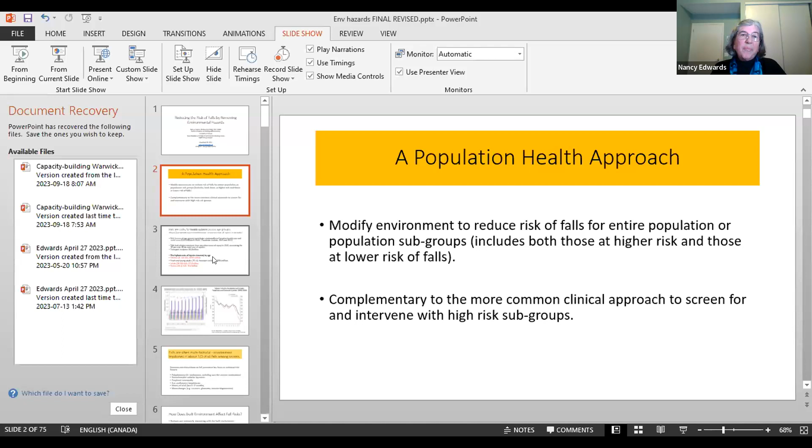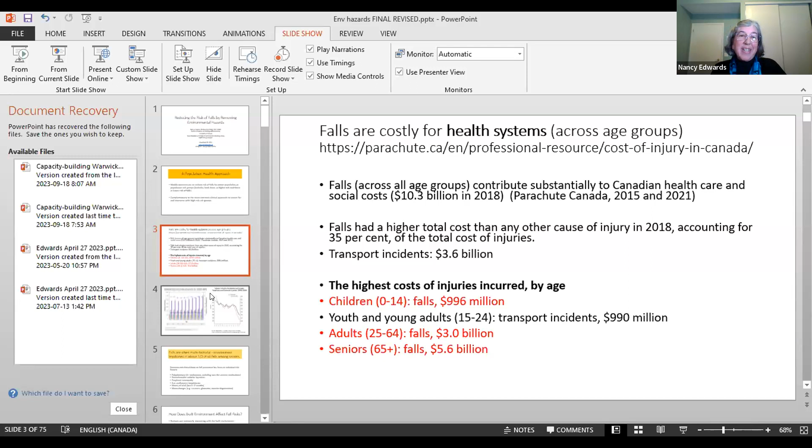So what is it that they're getting right in the transportation sector that we're not getting right in the health sector? Those declines in motor vehicle accidents are largely due to a number of changes that have been made in vehicles, but also changes specifically to the environment where people drive, like traffic calming techniques and others.

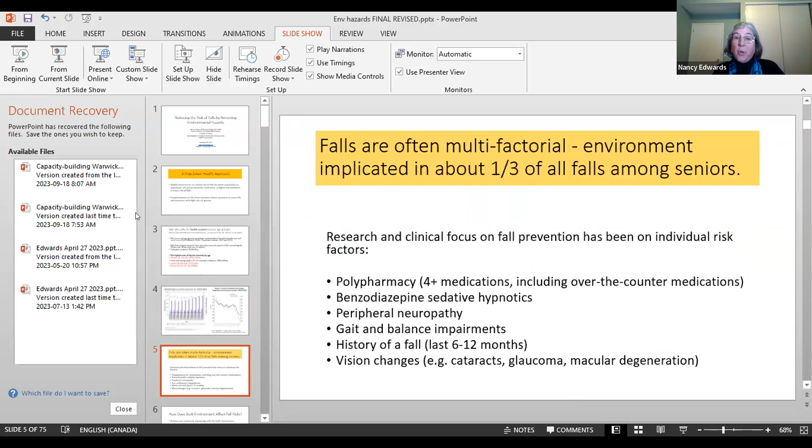Falls are often multifactorial, if not always. We've known this for a very long time, and there are many studies that show the environment is implicated in about 1/3 of all falls among seniors. But the focus often has been on these other risk factors. While those are important, it's the environment I'm going to focus on today.

So how does the built environment affect our risk of falls? Well, first of all, we are constantly interacting with the built environment. And there's something called environmental press, which occupational and physiotherapists know very well. This is where the environment actually challenges us. The environment can over-challenge us, which can be a problem, or it can under-challenge us, which is also a problem because we need that environmental press to help us stay physically healthy.

But there are features of the built environment where the environmental press is too much, and that increase the risk of falls. For example, transition points are often difficult to navigate. This could be because there's a change in lighting—think about going from outside to inside, from your ground floor to your basement. There's a change in surface friction, which changes the traction you've got with the soles of your feet or your shoes. There may be obstacles on walking paths. Steps and stairs are very common transition points.

The environment can also offer miscues—and I'll show you some examples in a few minutes—where it suggests to our vision, and perhaps to our tactile senses, that some change is going to happen in the environment, but the change that actually happens doesn't match the cue we got. We can also have environmental features that are very physically demanding, requiring a shift in our body position, our center of gravity, requiring us to maintain or restore our balance, like when we step into a bathtub or have to use our body weight to open a heavy door, or an increase in effort, like going up or down steps or stairs.

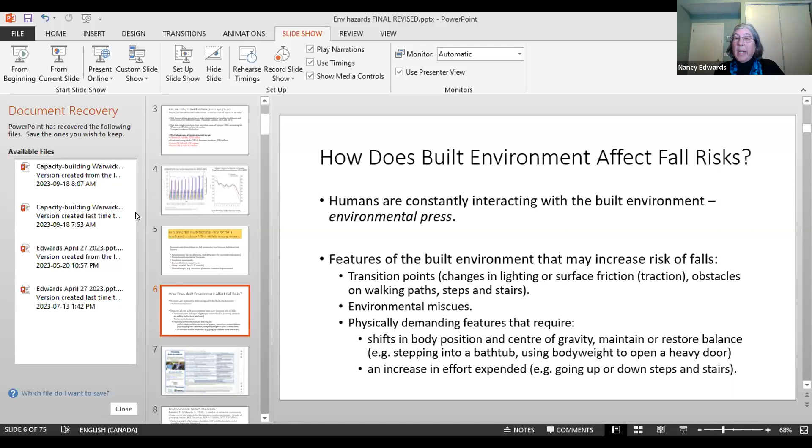Nancy, I don't mean to interrupt. I just want to see if we can try and troubleshoot the slide size. Let me just try this and see if that works. I just tried something else. Does that work? That works. Yeah, now we're seeing just the slide in its full size. Very good, thank you very much for that.

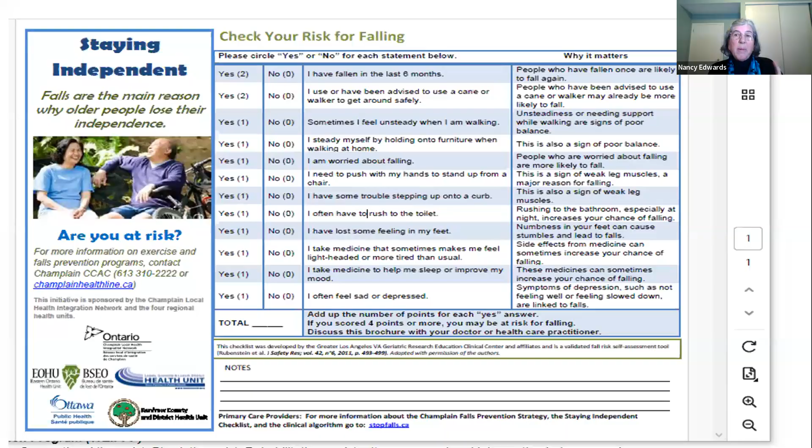Well, thank you. So here's an example of a very commonly used checklist. This one was developed in the Champlain district, but versions of this are used all across the country, and there are other types of examples. This is getting at the personal risk factors. I really like the column that says why the risk factor matters, so people understand that. But there's virtually nothing in this checklist that asks about the environment. So we've got a gap there.

Along with some colleagues a few years ago, we looked at the environmental hazard checklists available in the literature, and we found 42 different ones, most in published articles, some in the gray literature. But unlike that Champlain district checklist I just showed you, none of these environmental hazard checklists were widely used.

There was a lot of inconsistencies across them. For example, which rooms were assessed, whether or not they included indoor and outdoor stairs and steps, how responses were coded. There were very few checklists that even implicitly examined person-environment fit and that environmental press issue I just spoke about.

We were very interested in the assessment of bathrooms and stairs, and found that most of the checklists didn't focus on structural hazards in bathrooms like grab bars. They might ask about bath mats, they might ask about lighting, but not about actual grab bars or structural supports for the installation of grab bars.

And those for stairs and steps often asked about things like clutter on stairs, but didn't get at the construction geometry of stairs, like the dimensions of the treads, whether or not there were open risers, and so on.

So why focus on stair and bathroom falls, which is going to be the bulk of my presentation today? Well, first of all, we know that injury rates from falls on stairs and in bathrooms are much higher than injury rates from falls in other locations, 65% versus 25% overall.

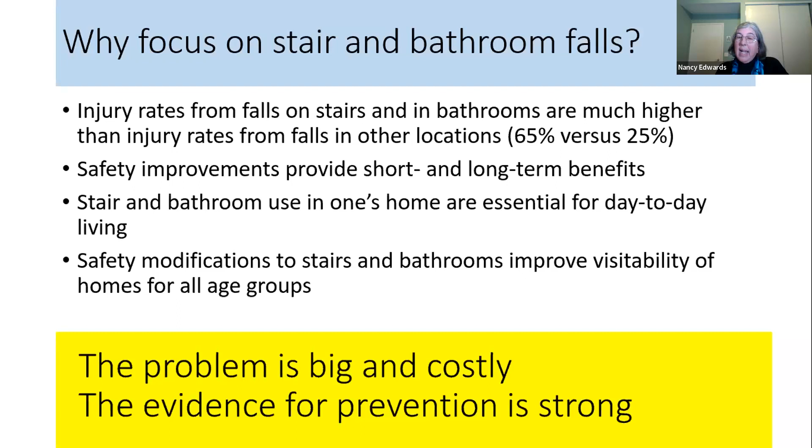They looked at the rate of falls at home per person per year that needed medical treatment, and found that after adjusting for age and many other confounders, the injuries specific to the home modifications had actually reduced the risk of falls by almost 40%. This study has been replicated more recently with Maori people in New Zealand with very, very similar findings.

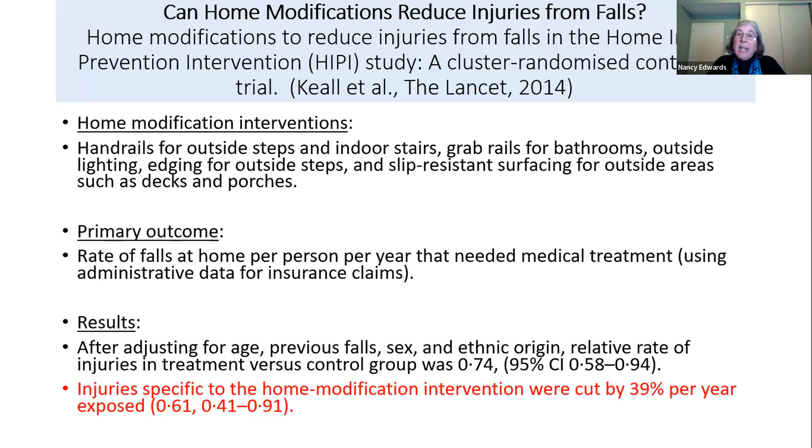It's too expensive. Making renovations to my home is a hassle. I can't find a reliable renovator. I don't think my landlord or my strata council or my board will allow me to actually make any changes. Often people haven't asked, but that's their impression. A change might reduce property value.

I'm not old enough and I'm healthy. I don't need to make any changes yet. I hear that often. I like the way my home is, and I know where the hazards are and I can avoid them. So add other cons to making changes that you've heard in the chat, if you don't mind.

Let's look at the pro side of the equation. Well, I want to stay in my home. I want to age in place and I want to be safe. I want to reduce my risk of an injurious fall. Perhaps I want my home to be more visitable for friends and family.

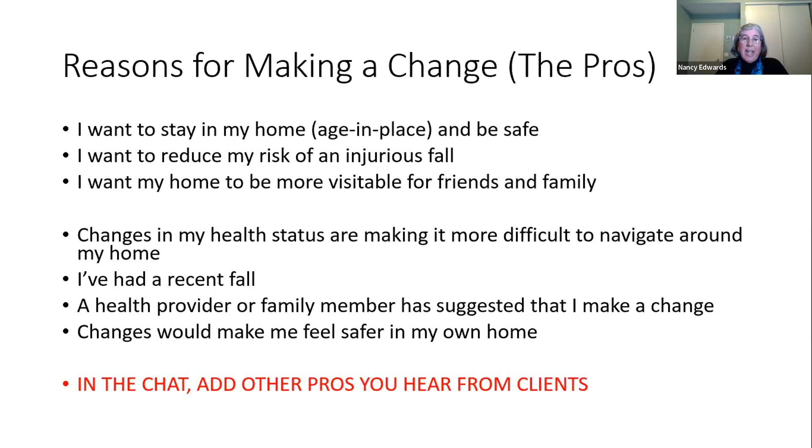Changes I'm starting to experience in my health status, and this can be at any age, are making it more difficult to navigate around my home. I've had a recent fall. Sometimes that is a reminder that people are feeling vulnerable. A health provider or a family member has suggested I make a change or changes that make me feel safer. And again, I invite you to add pros that you have heard in your work and in your lived experience.

So let's go to stairs. What we know is that over 50% of Canadians 55 and older actually have difficulty climbing stairs. So that's pretty common. And of course, as you get older, often it's more challenging. Stairs are actually the main reason for people needing to move or restrict where they live, from a two-story home, for example, to a single floor, the main floor.

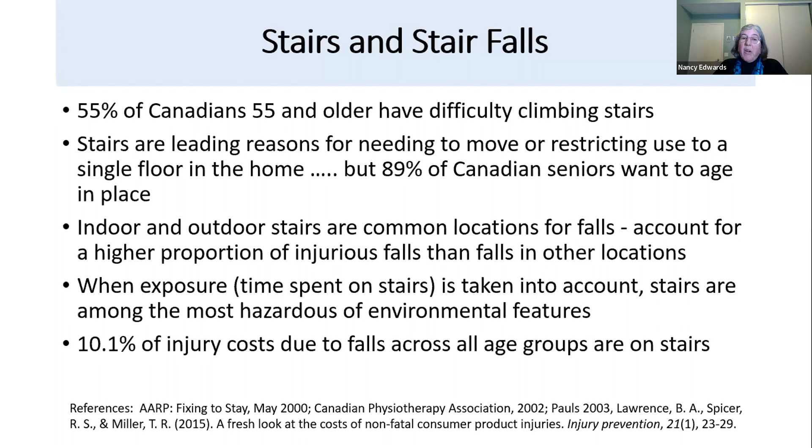However, most Canadians want to age in place. We know that both indoor and outdoor stairs are common locations for falls. If you think about falls on stairs, you don't spend very much time going up and down stairs in a day. So when you take into account actual exposure time, stairs show up as being among the most hazardous environmental features. About 10% of all injury costs due to falls across all age groups are on stairs.

This is the anatomy of a staircase, and I'm going to use a few of these terms, just to make sure we're all on the same page. A baluster is what helps provide a guard function on your handrails. The tread is what you step on, also sometimes called a run. The riser is the height of the stair, and the newel post helps hold the handrail in place. Those are the terms I'll be referring to in my examples.

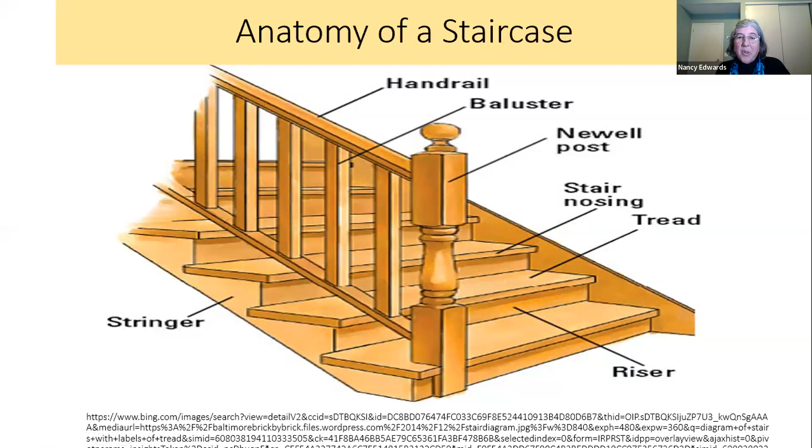There are many common, correctable stair design faults. Non-uniform stairs is one, and this quote is actually from the building code. You can see that when builders construct stairs, they're allowed only a very minimal tolerance for changes between one stair and the next, to try to reduce this non-uniformity problem.

Risers can be too high, or they can be open. If risers are open, there's no backing there, basically. That means when you step on that stair, you may actually project your foot beyond the tread, and that can trip you up as you continue up the stairs.

There may be insufficient landings, or they're not large enough, at the top or bottom of stairs or even midway. There's insufficient or variable lighting, commonly no toggle switch, so you have to go down the stairs to turn on the lights, or vice versa. Surface materials used may provide inadequate slip resistance, and there are a lot of issues with handrails. Of all the things I've listed, other than lighting, I'd say handrails are the ones that are easiest and least expensive to correct.

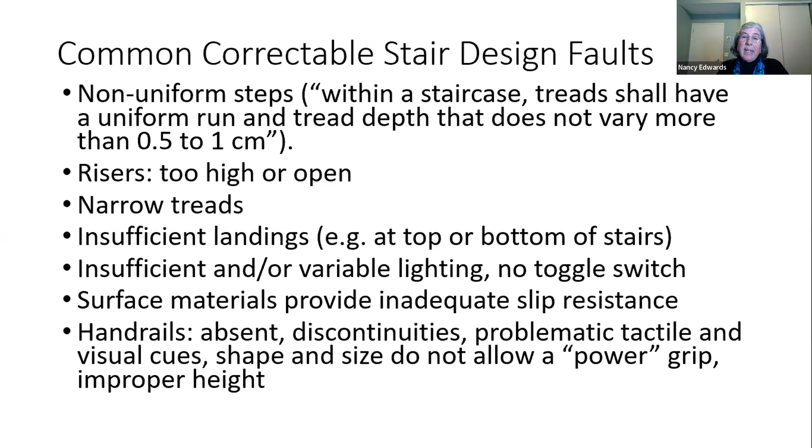I'll show you many examples of these, but handrails can be totally absent, or there may be only one handrail when really you need two. There can be discontinuities in those handrails, problematic tactile cues, size and shape that don't allow a power grip, or improper heights. So let's look at some examples from the community.

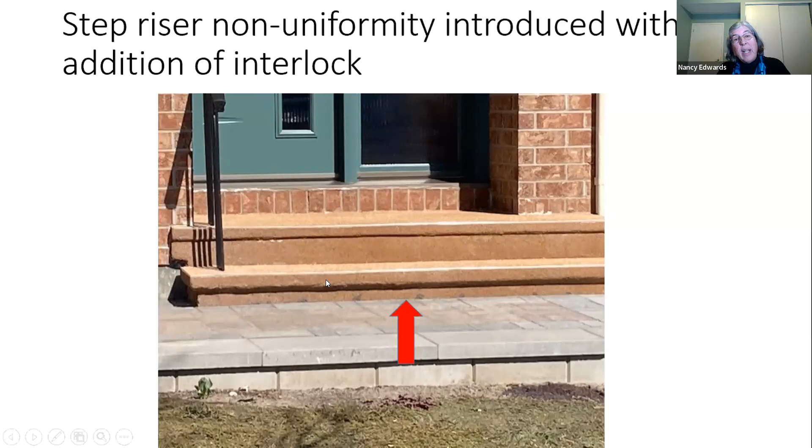I see this problem a lot — I'm not sure about your own communities. When I walk around my area of about 100 bungalows, most people have had interlock put in, and often the interlock has introduced a non-uniformity. Here, these original cement blocks that were part of the structure of the homes were even — the risers were the same height — but interlock was put in, and now you have differential heights between these two steps.

For graspable handrails, the important thing to remember is that the best grasp is what's called a tennis racket grip, which is a power grip. That means the diameter of that handrail should be between 4 to 5 centimeters.

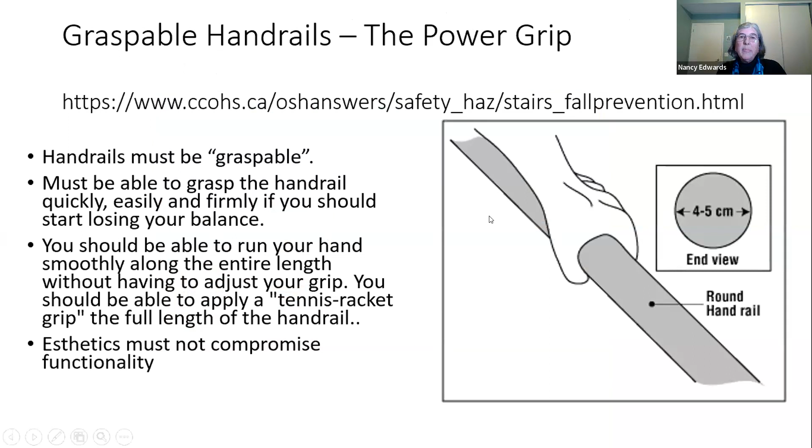Here's an example on the left of a long set of stairs, so high environmental press, and no landing. That's really too many stairs in a row without a landing, and newel posts along the way, which mean that you lose your grip as you go.

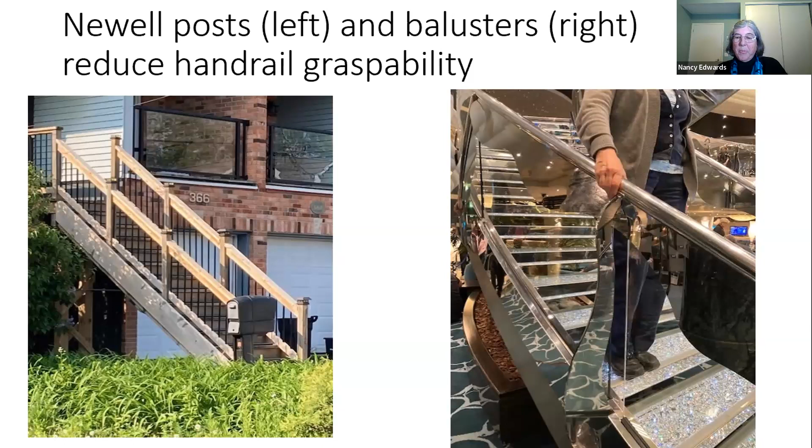Here's a picture on a cruise. This handrail wasn't too bad until you got to the balusters, which were very decorative, and which meant that you had to partially release your grip on the rail. And of course, open risers and the lighting on those stairs was terrible.

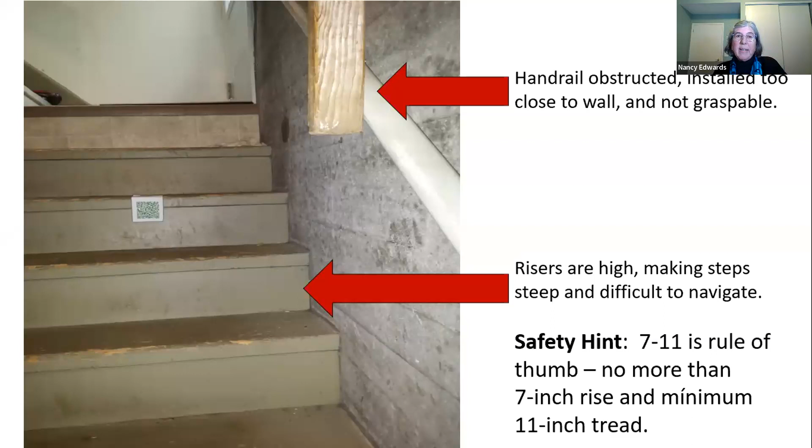The rule of thumb is a 7 to 11 rule: 7 inches for the riser and 11 inches for the tread. Here's another example, and I think what we have to be able to do and encourage our clients to do is how to spot the hazards. Typical set of basement stairs. Can you see the hazards? There's quite a few of them.

First of all, we've got wedge-shaped stairs, so the handrails unfortunately bring you down along the area where the wedge is, so that you have, for these ones, a tread that is not nearly sufficient. It would not match the 11-inch rule. You have a discontinuity in the handrails that happens as you navigate the wedge-shaped stairs. There's open risers and uneven lighting with no toggle switch.

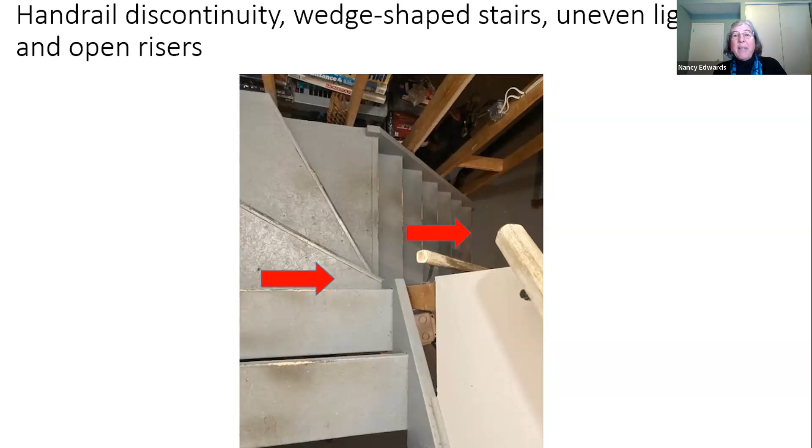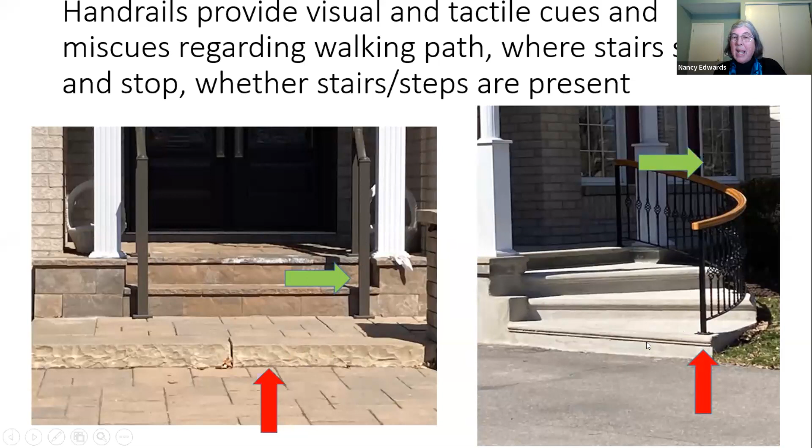This handrail is good because it actually brings you down a walking path which is on the widest part of the tread rather than the wedge shape of the tread, but the handrail does not extend beyond the bottom step. Single steps can be a real problem.

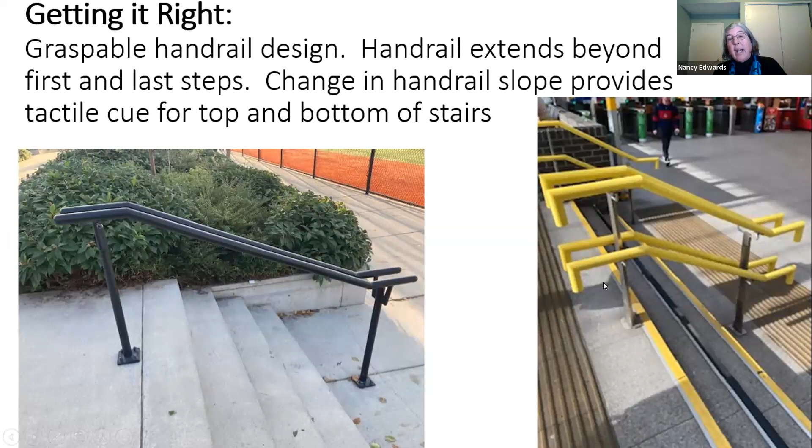Somebody else tripped, there was another complaint, and they put in a mega handrail to mark this very small step. Here are examples of getting it right, where the handrails extend beyond the stairs at the right height. They have tactile cues that tell you where the stairs stop and start. There are additional cues on the cement here, and this actually has a handrail that would be very suitable for young children. And here's one that's got it almost right because this extends beyond the bottom step, but in fact there's a newel post there, which is problematic.

So we've seen lots of changes to stair building codes, and there's a partial success story here, which meant that there was a strong proponent behind it. There was extensive research. Cities were worried about it in public places because they were getting lawsuits when people had a bad fall on public stairs. Recognition, I think that retrofits to improve staircase geometry are very expensive, so you've got to get it right from the time that you build. Handrails you can put in later, but staircase geometry is more difficult to fix.

Consumers have a lot of experience with safer stairs, and they start to wonder, well, why is it so easy to navigate stairs in a public space that are good stairs, and I go into somebody's home and I can't navigate easily? And Parachute, when changes were put forward, developed an information package to help guide input to the Canadian Commission on Building Codes during what's called the public review process. And here are examples of changes that resulted from all of that effort.

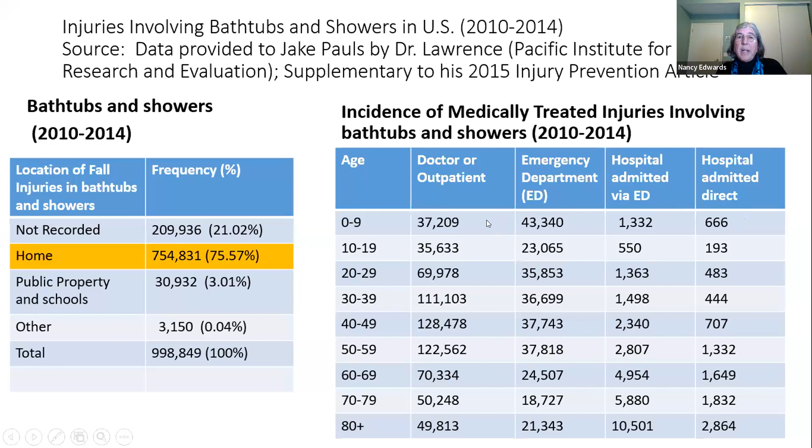So I'm going to switch now to grab bars in bathtubs and showers. And here I'd just like to show you that this is an issue across all age groups, again, as you can see on the right. And we know that about 76% of falls in bathtubs and showers occur in the home. You can see that even for 0 to 9-year-olds, the incidence of medically treated injuries is significant. So it's something we all need to be concerned about.

Why grab bars? Well, they provide a point of control for safe transitions. And there's two transitions you generally have to make in a bathtub. You have to enter and exit the tub, and then you have to sit down and stand up from the bottom of the tub. When you're transitioning into showers, it may just be the entry and exit onto a different surface or over a small ledge that is pertinent.

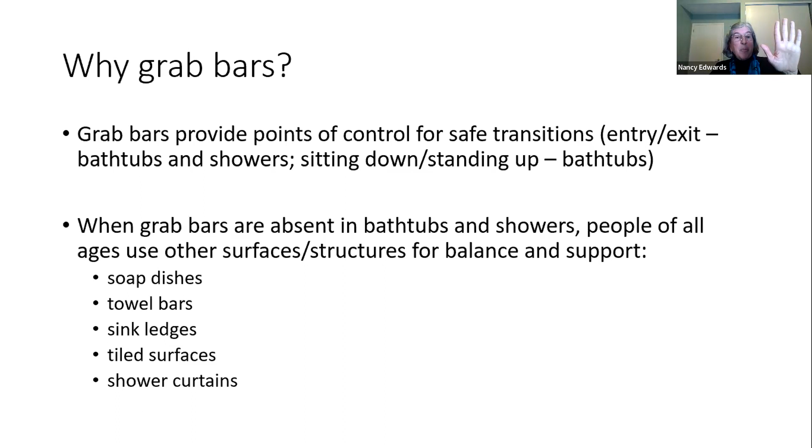We know that when grab bars are absent, people grab onto other structures. And I'm sure you've all got examples from your clinical experience of soap dishes that have come out of walls, towel bars, people grab onto sink ledges, but they're not in the right position to support them. We know from laboratory work that people will actually at least touch the tiled surface to provide a little bit of balance for them if there is no grab bar there.

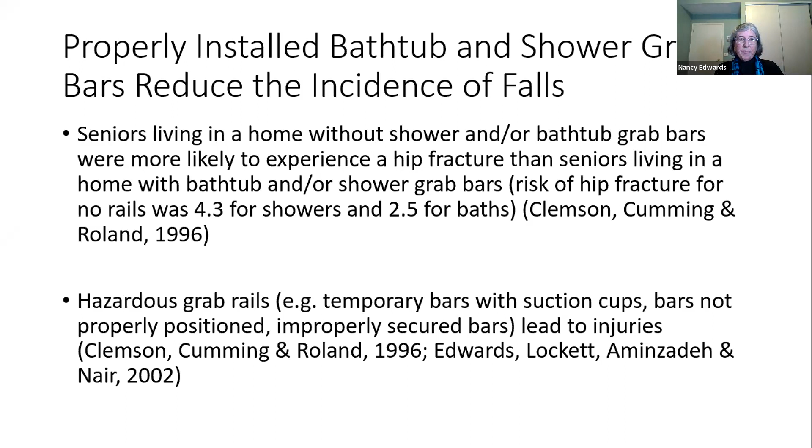And we also know that properly installed grab bars reduce the incidence of falls. Here's some early work showing, for instance, that the risk of hip fracture for no rails in showers was 4.3 times higher than for showers with rails, and 2.5 times higher for baths. There's a lot of research that's been done in laboratories sorting out what configurations of grab bars are important and ergonomically sound, feel comfortable for people.

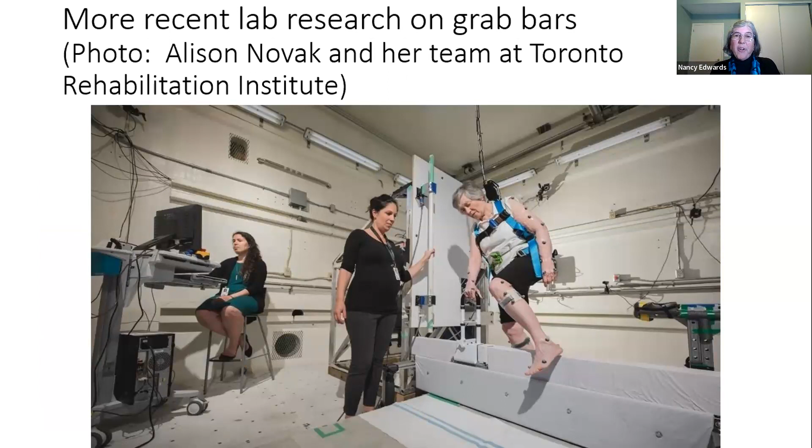They are grab bars that people use when presented with the option of using them. And more recent work on grab bars by Alison Novak and her team in Toronto, where they actually are able to perturb or move the bath as somebody transfers in and out. You can see this woman is in a safety harness to see whether or not they actually can grab the grab bar successfully. The answer is yes, to prevent a fall when they are trying to get in or out of a bathtub. And we know from all this research that for everybody, this is good universal design.

This works for all age groups, all abilities: we need a minimum of 2 grab bars in bathtubs and a minimum of 1 vertical bar for standalone showers.

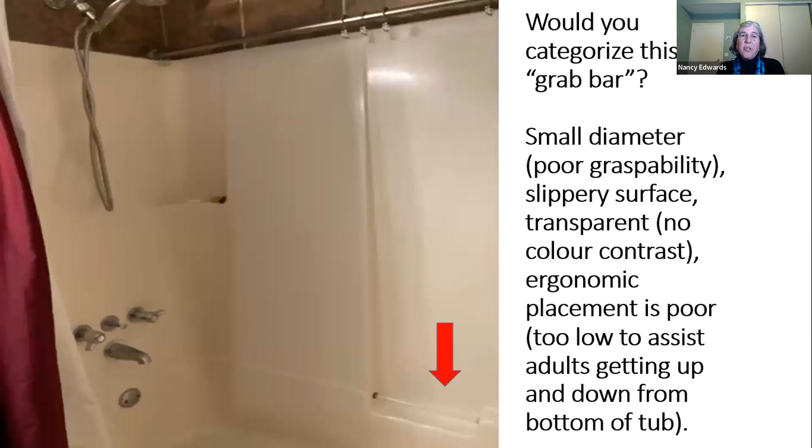So what's out there? Well, it's a whole mix of things. Here's an example of a shower bath with an acrylic surround, and the grab bar down here is transparent, very small diameter, has a slippery surface, and the placement is really poor. It doesn't really help you get up and down from the tub.

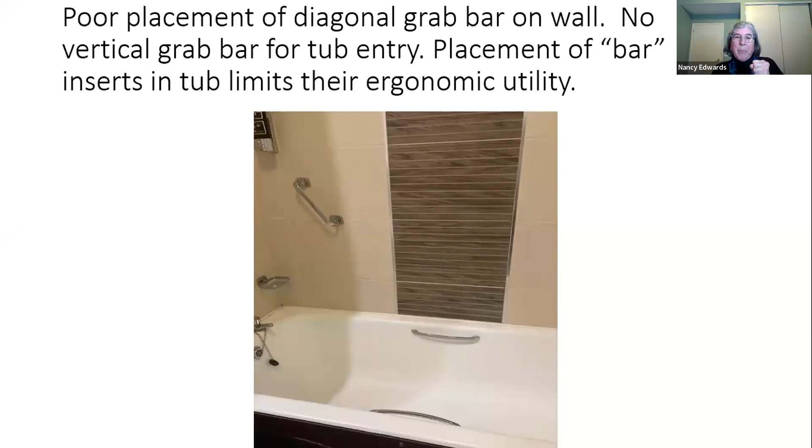Here's one where it's very poor placement of the diagonal grab bar in the wall. I think because there was some brick. This was a hotel in the middle here, but it really doesn't serve you well for getting up and down from the tub. Maybe they thought that these alternate bars in the tub would suffice, but they're not graspable. They're in the wrong place.

We have much more accessibility legislation in Canada. We're late in getting it. In the US, it was implemented earlier, largely because of vets coming back from the Vietnam War with disability, and that pushed forward the Americans with Disabilities Act. But we now have a number of provinces and the feds who have accessible legislation. And I would urge you to become familiar with that.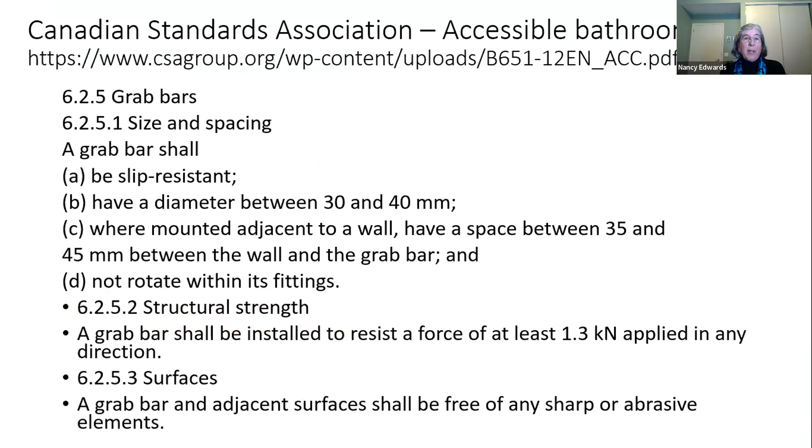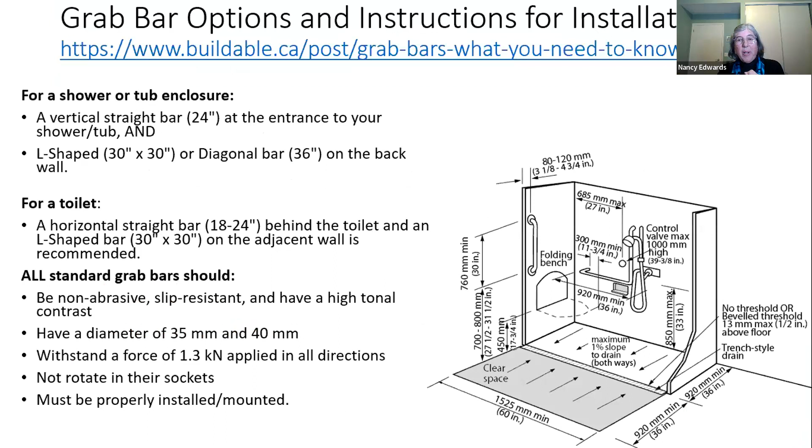And here's just another example of illustrations of how to install these kinds of features so that we've got grab bars that are properly in the wall.

But we've had a stalled policy change around universal grab bars in Canada that I've had quite a bit of involvement with. In 2007, I was a proponent for a change to grab bars in Canada. I proposed that grab bars should be a universal requirement in all showers and bathtubs. We're now in 2023, and that requirement has not gone through.

So what happened in the meantime is that there was a number of technical review committees put together by the Commission on Building Codes to specify the technical requirements for grab bars and sort out what was needed for universal grab bars versus grab bars specifically for those with more physical limitations. It went out for public review before the 2015 code cycle.

And what we got was a great deal of pushback from industries, in particular those involved in manufacturing acrylic tubs that don't include grab bars, saying this was going to be a problem for their industry. They could not make the changes very readily. And we heard from many industries about this.

In contrast, we got very few comments from those who are part of the public, including people with occupational and physiotherapy training. And when we got those kinds of comments, they tended to be just very short comments like grab bars are important, but no further justification. What we were getting from the industry was 3 or 4 page long submissions of their review comments.

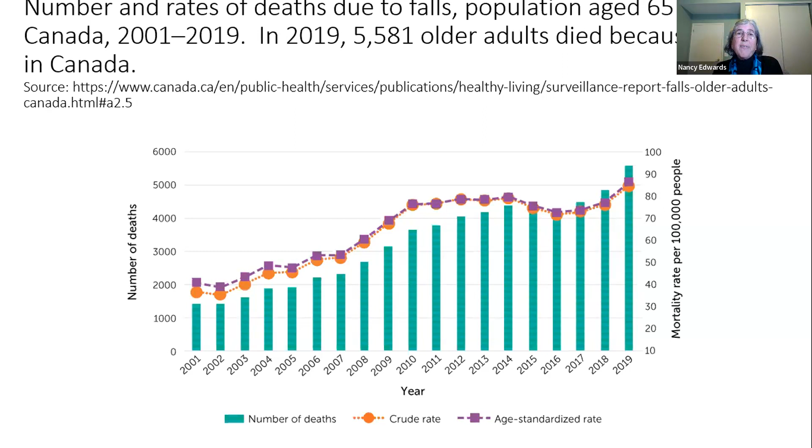We underestimated the impact of design trends like acrylic tubs and showers, and underestimated the objections we would get from the manufacturing industry. There was actually some pushback from those we thought would be advocates and allies, like advocates for accessibility, who had concerns that if grab bars were required, they might get in the way of other accessibility features for those with physical challenges.

And occupational therapists, some of whom felt that perhaps all clients needed to be assessed by an OT for the optimal placement of grab bars. While I agree that's really important for people with physical limitations, for universal design, everybody gets the same universal design, and then you can add other grab bars for special needs.

The stigma I've mentioned, it's hard to decouple the issues around accessibility for those with physical limitations versus universal accessibility. We have not driven consumer demand for safer bathrooms. So lots of issues there.